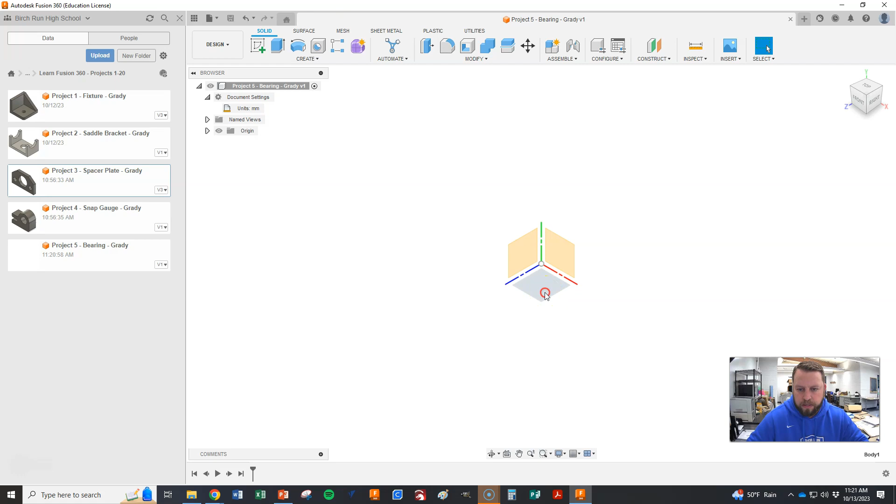So back to Fusion, and we want to be in the top view this time. I right click, and then I'm going to create a sketch, and we're going to hit C on our keyboard for circle. I already forgot, 70 and 100. 70, and I'm going to hit C on my keyboard again, and 100.

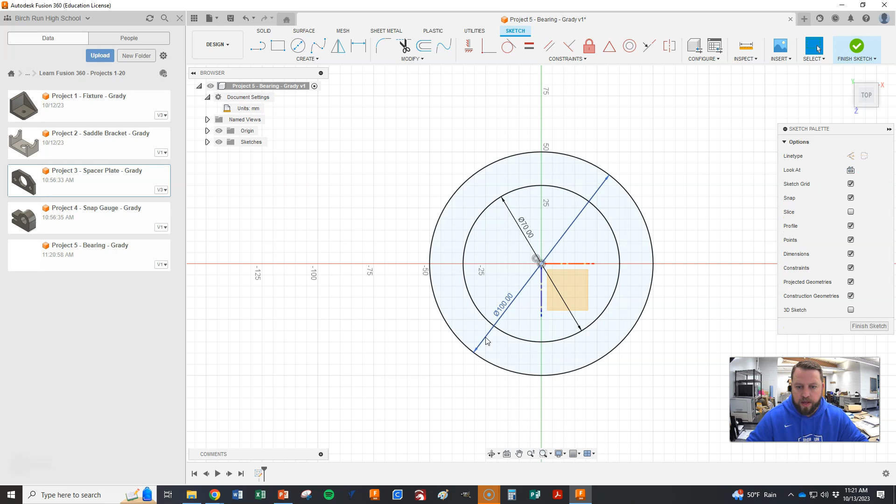And then we really need basically another 100 circle down here, and its center point is at 140, and it's right in line with each other. So let's see if we can figure this out.

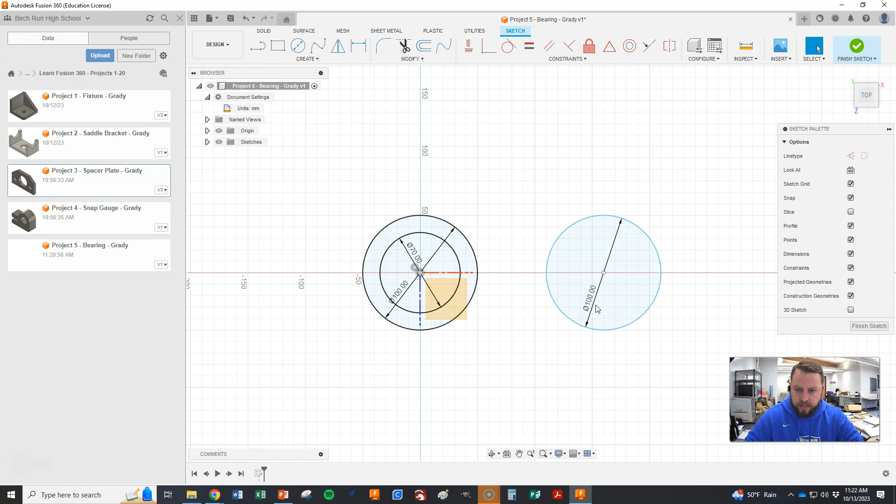So I know I want it right here in this. I'm just hovering over this origin to kind of wake it up and let it know that I want to be in line with that. And we're going to make it 100 again, and our dimension then needs to be from here to here of 140.

And you can see that this is still not defined, right? So if I hit escape and go to move it, it'll move wherever I drag it. What we want is this center point in line with this center point. So let's try the collinear constraint and see if that works to line them up. Okay, didn't do exactly what we wanted, so let's hit escape on that.

Let's try, maybe horizontal will work. This to that, there we go. So it snapped in, making those two points perfectly horizontal with each other. That was the horizontal/vertical constraint, and it worked good for us.

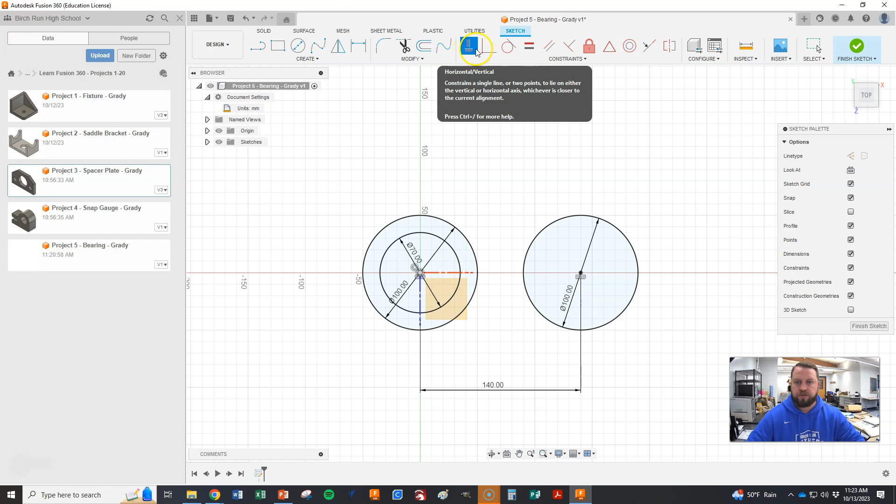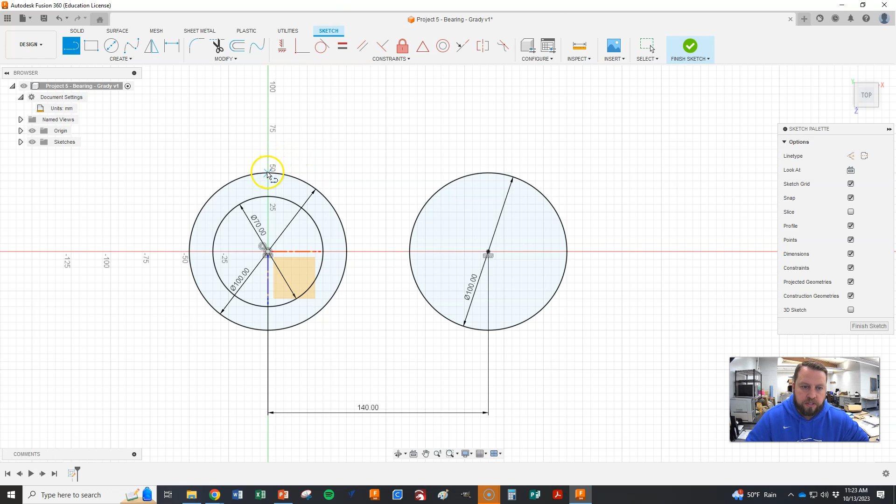So now what we can do is let's try to work on connecting those. Here's how we're going to do this, you've got to kind of pay attention here. I'm going to get rid of that for the time being. We want our line tool, and I'm going to be sure I don't want to click here because it can confuse it. This is one of the times where you don't want to be close to this because then it's confusing, and we want to make sure we're exact.

So I'm going to purposely make sure I click down this arc, and I don't want it horizontal yet. I'm going to make it kind of angled, just like that, and do the same thing somewhere over here. Just don't make it perfectly horizontal, give it an angle, because we want to use some constraints to snap it in exactly how we need it.

So what we're going to do over here is go back to our constraints, and this time we're going to use this new one called tangent, we want this line tangent, right?

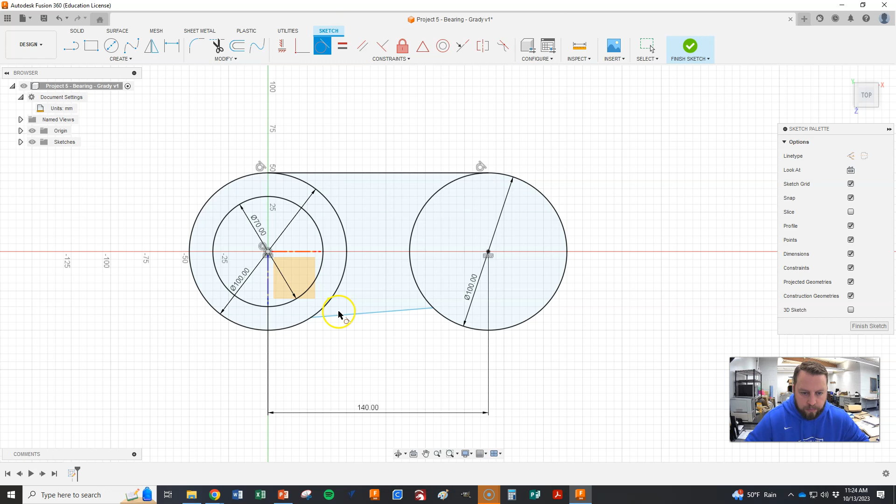The constraint is tangent, meaning where the line perfectly flows into the arc. We're going to hit tangent, and we want this line tangent to this circle. See how it snaps in and flows right into it? And then we also want it tangent to this side. We'll do the same down here, tangent to this, and tangent to this.

We can use the trim tool we already learned and cut that out of there. We're going to need a slot, that's what we're calling this, a slot that goes 35 millimeters and has a radius of 12.5. Let's see if we can use the slot tool.

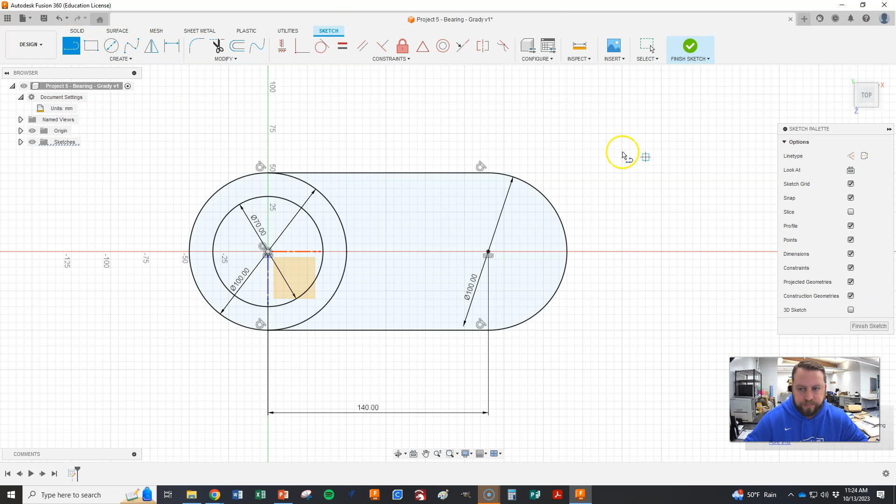We're going to go to create, and we're going to go slot, but it says we need center to center. So before we do that, let's make a line, and we're going to go construction, right there, perfectly horizontal, and we want that 35. That locks in this construction line.

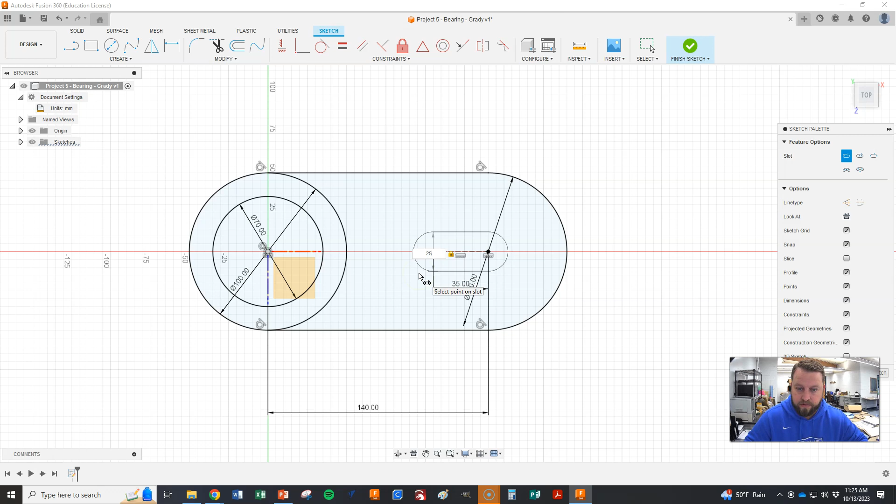Now let's go to create, slot, center to center. I'm going to turn my construction off so it's a solid line. I'm going to go from here to here, and it's just going to ask what I want to go across. It gave you the radius of 12.5, and here it wants the diameter, so 12.5 times 2 is 25, and we just hit enter. Now we've got our slot in there at 25.

Why does this look so much shorter to me? I'm going to go back in and check that. I'll be right back with you.

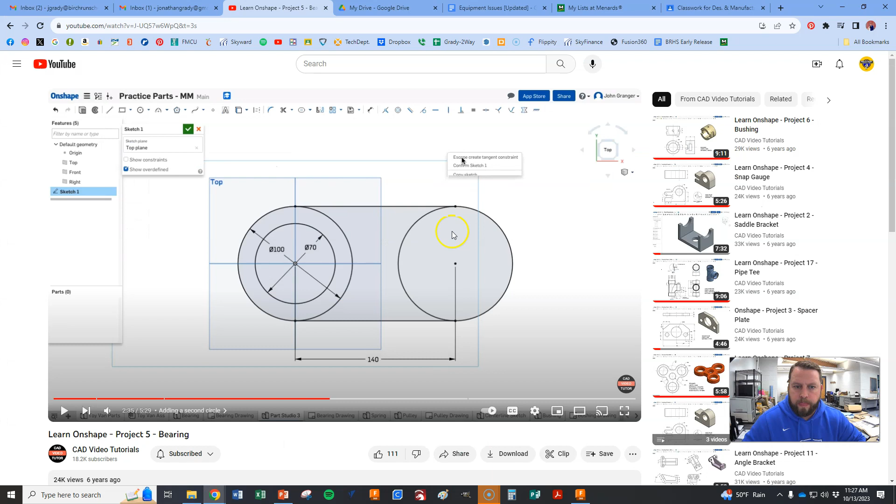Okay, I figured it out. There was a typo in that schematic that I'll go back and fix for you later. This should be 70. All we have to do is double click that, change it to 70, and that looks a lot more like what we need it to look like. They just happen to have this incorrect label here, so I'll fix that, and then we'll go with 70 on that.

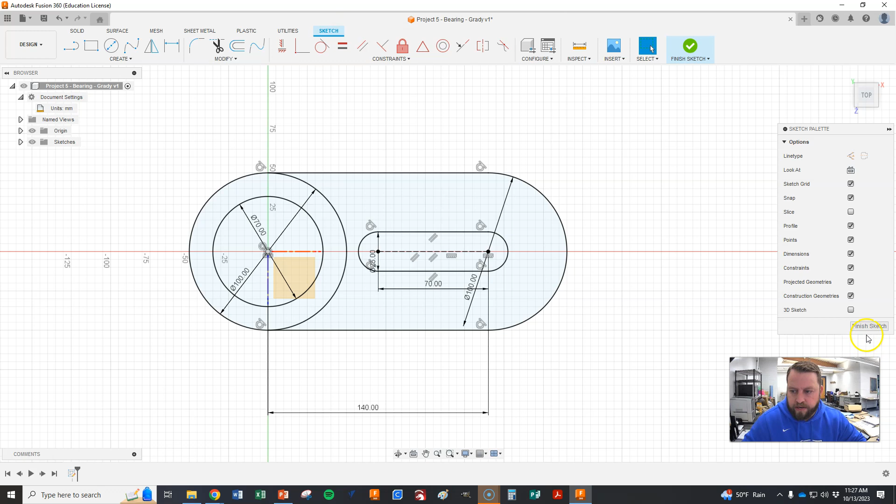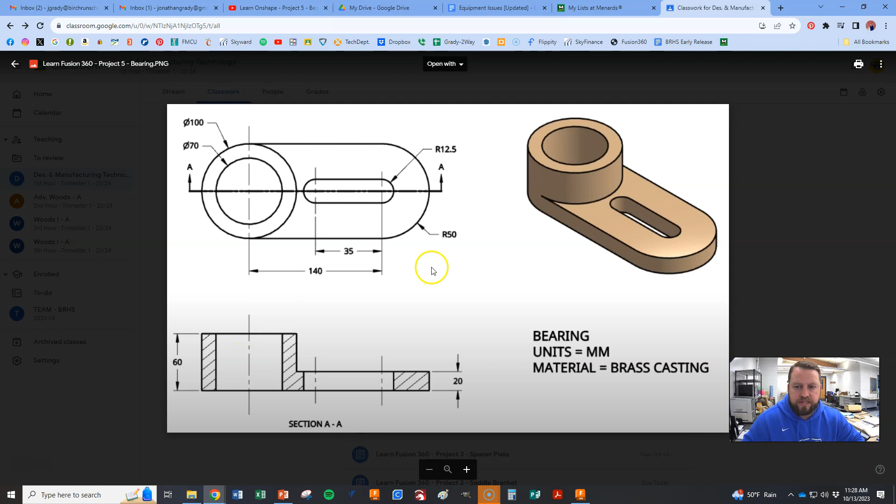So there's our final drawing, and now we've got some extruding to do. Let's take a look. We need the base to be at 20, which is this right here, and then this part here to be at 60. So let's do E on our keyboard for extrusion.

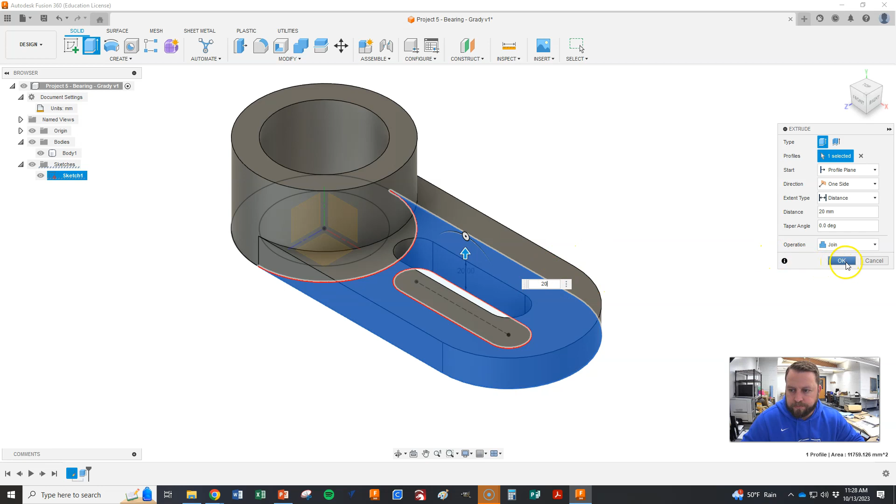We'll do this first, and let's take that up 60 and hit enter. Now we've got to go back over here and bring that sketch back up so we can see it. Hit E on our keyboard again, and now we've got to bring that up. We want to make sure this says join, and it does, so hit 20. Now we can hide that sketch again, and there is our bearing.

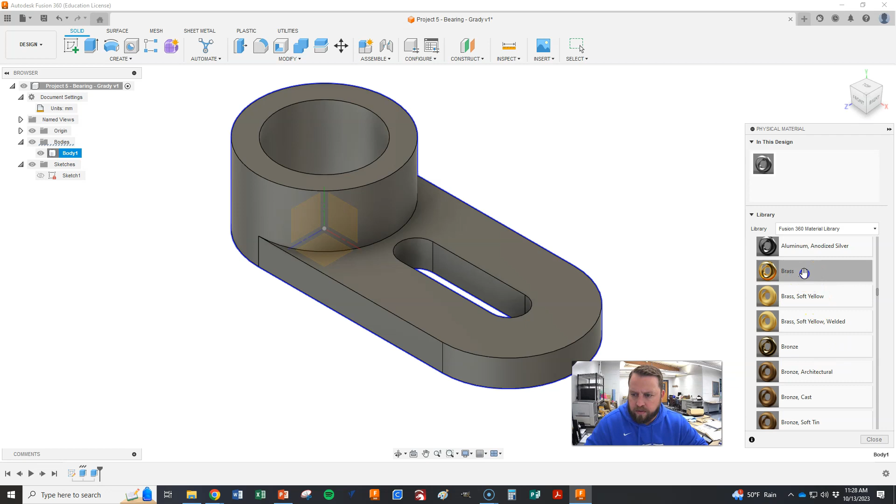So now all we've got to do is assign it the material. Brass is a metal. Scroll down, and it said brass casting. So right there - oh, it's bronze. Brass, I thought there was a brass casting, maybe not. So we'll just go with regular brass. There we go, we can close that.

Right click on body, open up our properties, make sure we got a good view here. And then I'll turn my origin off. This would be what you would take your screenshot of. All right, thank you.